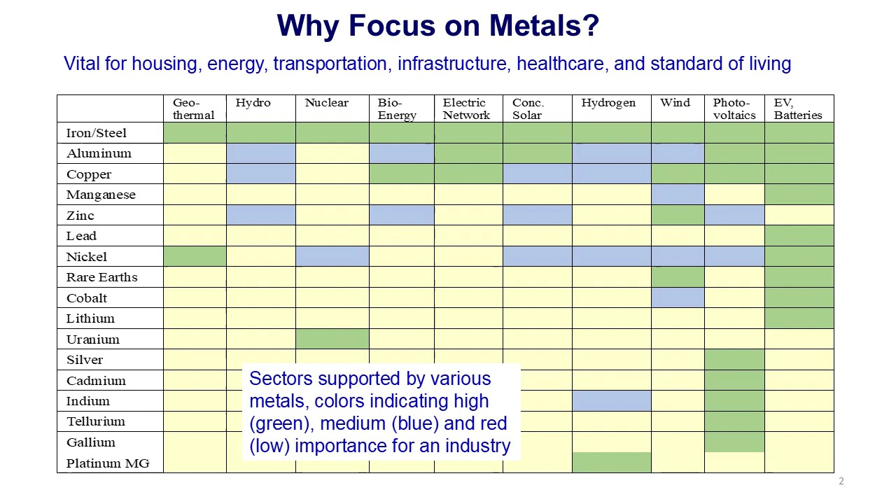The metals industry is at a crossroads, facing simultaneous challenges and opportunities. On one hand, we have finite reserves, declining ore grades, and the pressing need to align with international climate goals. On the other hand, these challenges push us toward innovation, collaboration, and more sustainable practices. By focusing on smarter resource utilization, advanced recycling, and greener production technologies, we can turn these challenges into opportunities to modernize the industry while addressing environmental concerns.

Let's look at the lifetimes of our current metal reserves. Metals like iron and aluminum have lifetimes exceeding 50 years, offering some breathing room. However, critical metals like cobalt and zinc are at risk of depletion within a few decades. The increasing demand from green technologies shortens these timelines further.

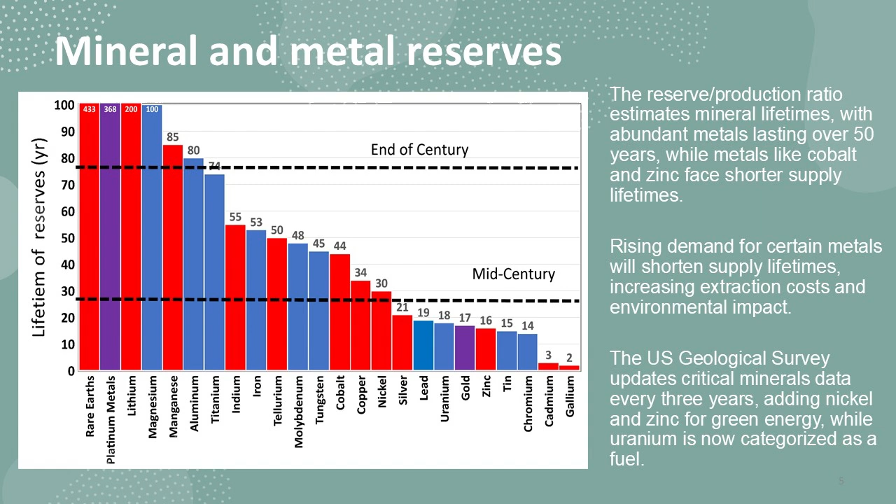As we move into the mid-century, metals like copper, lead, and zinc are projected to surpass their critical supply limits. This overuse poses significant supply chain risks, especially as demand for green technologies grows exponentially. The solution lies in developing viable alternatives, increasing recycling rates, and investing in mining technologies that can extract metals more efficiently and with less environmental impact.

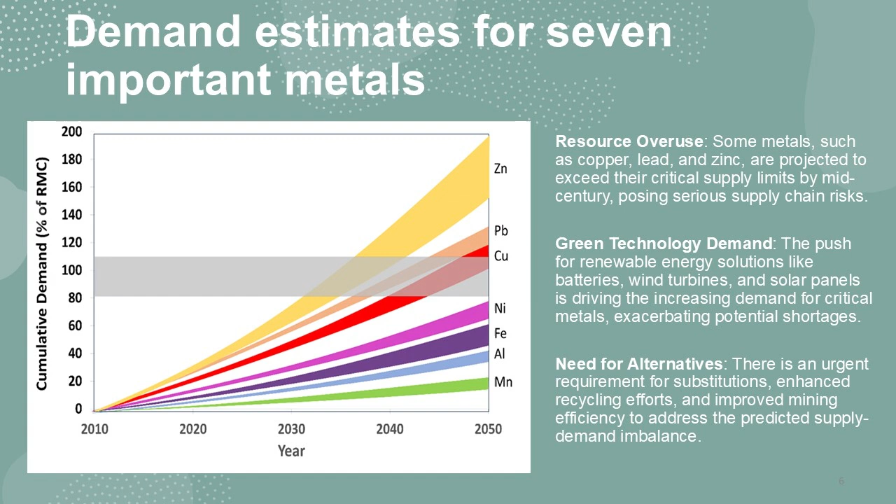The metals industry is a major contributor to greenhouse gas emissions, with steel production alone accounting for a significant portion. While energy efficiency in steel production has improved over the years, achieving net zero emissions remains a challenge. Innovative processes like top gas recycling and HIsarna ironmaking offer promising pathways to reduce emissions and increase energy efficiency. Scaling these technologies, however, will require substantial investment and international cooperation.

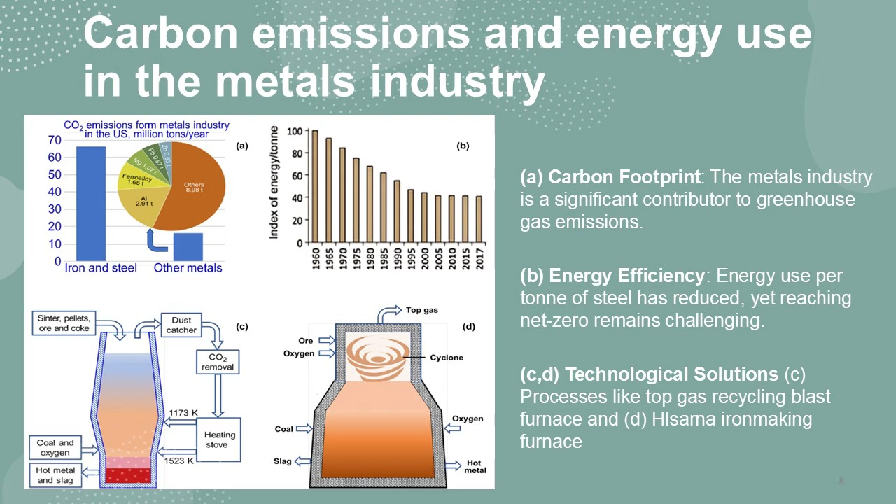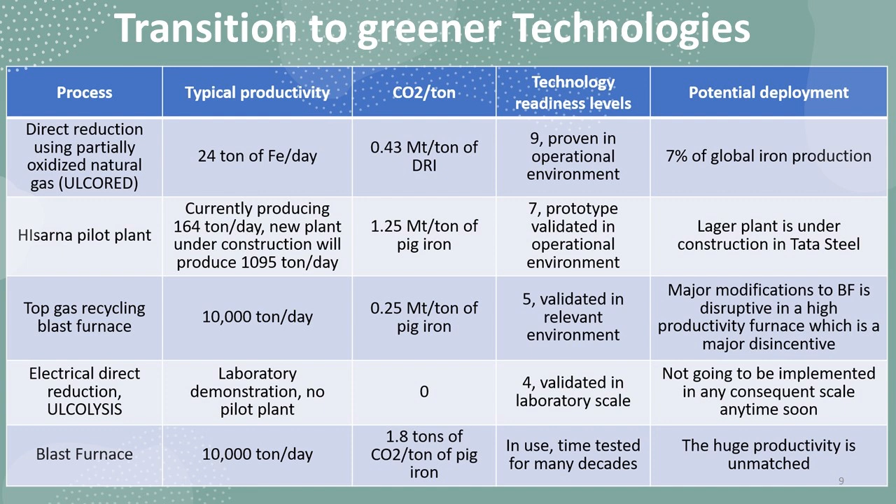Transitioning to greener technologies is no longer optional, it's a necessity. However, the shift is fraught with challenges, from high initial costs to technological limitations. Processes like hydrogen-based steelmaking and advanced recycling technologies hold the potential to revolutionize the industry. Yet their widespread adoption depends on scaling, capital investment, and global policy alignment.

Recycling and substitution are key pillars of a sustainable metals industry. Efficient recycling of critical metals, particularly from electric vehicle batteries, can help sustain reserves and reduce greenhouse gas emissions. Additionally, exploring alternatives like thermal energy storage systems made of concrete can reduce dependency on scarce metals. Such innovations not only lower environmental impact but also provide scalable solutions for future needs.

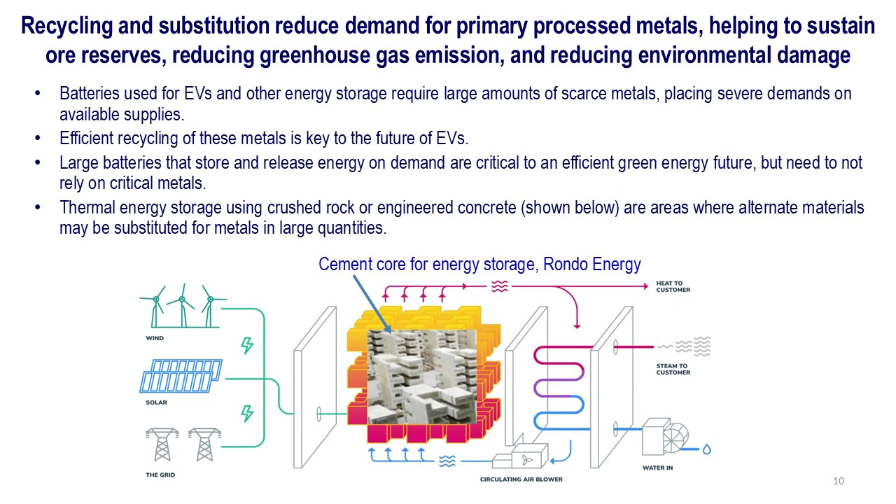Innovations in metallurgy are transforming the industry. Nanostructured steels, for example, offer unparalleled strength and resilience, while 3D printed components like aircraft heat exchangers reduce material use and increase efficiency. Shape memory alloys and high-entropy alloys further highlight the potential to replace or supplement traditional metals, reducing our dependence on scarce resources.

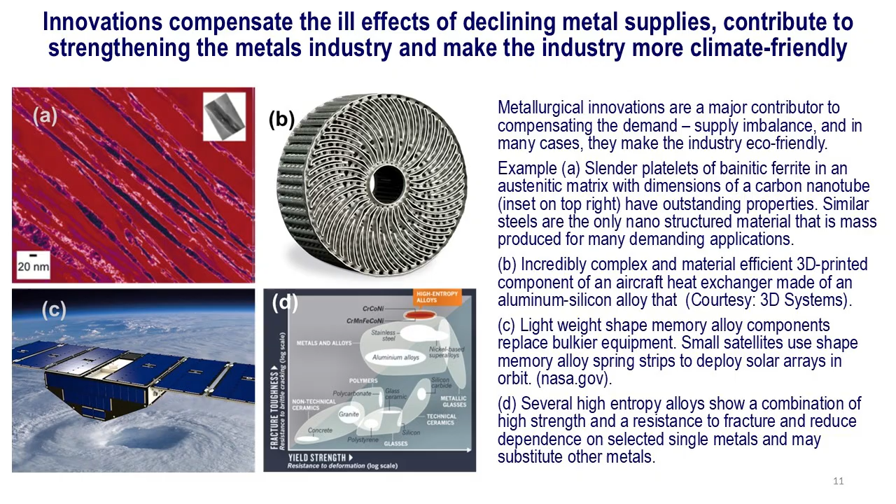Collaboration between policymakers and industry leaders is essential to ensure the metals industry transitions to a sustainable future. Policies that incentivize green technologies and support recycling initiatives can drive change. Equally important is engaging younger generations, particularly Gen Z, to advocate for eco-friendly policies and foster international collaborations.

The key takeaway is clear: metals are indispensable, but their production is environmentally taxing. Advanced technologies and innovative solutions like bainitic steels and efficient recycling offer practical pathways to address these challenges. However, scaling these solutions requires time, investment, and the collective effort of stakeholders across industries and governments.

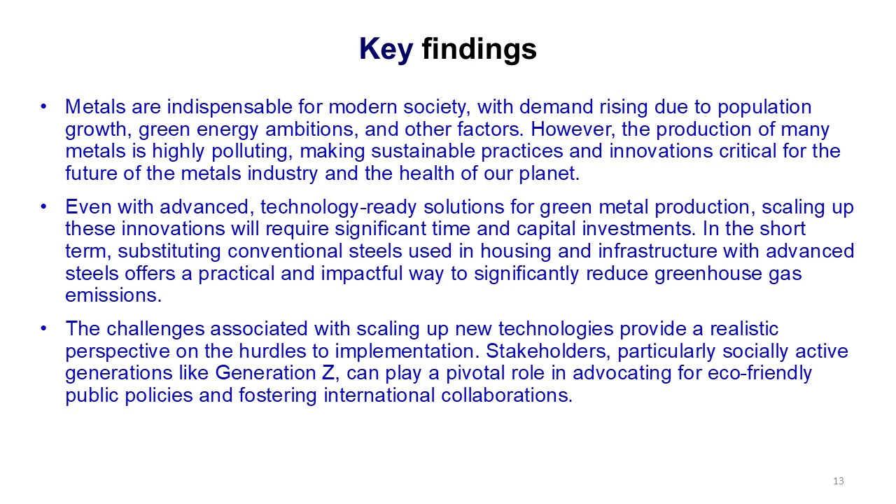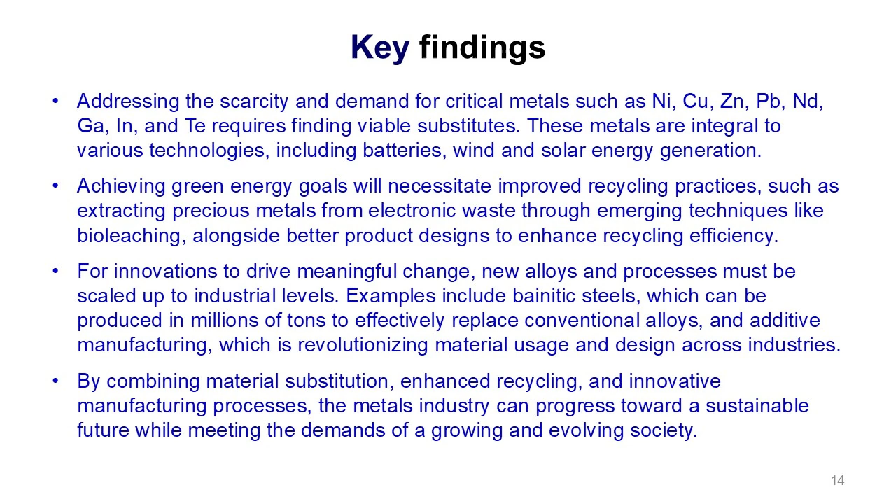To meet the challenges of scarcity and rising demand, the metals industry must embrace a multifaceted approach. What we do here will be important for the industry and our environment. Improved recycling practices, material substitution, and innovative manufacturing processes like additive manufacturing are crucial. By combining these strategies, we can create a sustainable future for the metals industry while meeting the needs of a growing global population. Please take a moment to let us know what you think about this issue.